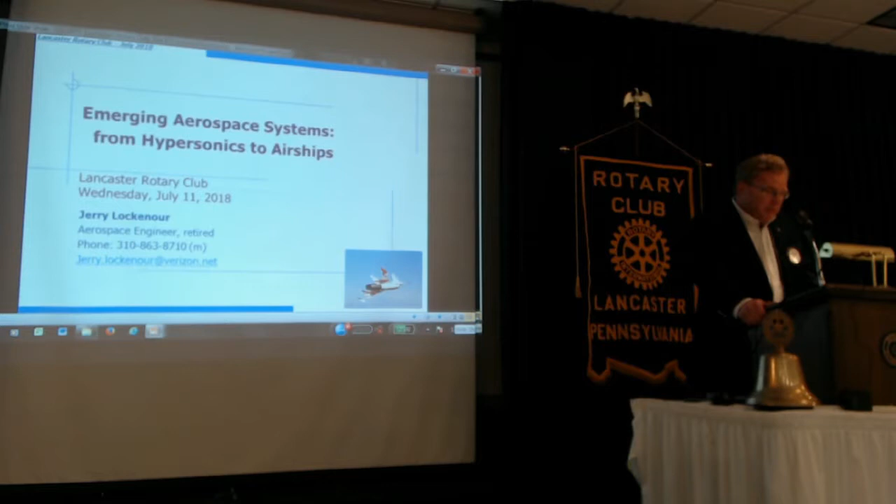Thank you. I'm coming to you from 40 years in Southern California. I moved here to the Lancaster area, and I didn't learn how to say it right off the bat 2 years ago. So I'm new to your area, but I appreciate the opportunity to talk to you. I did have a good excuse for not knowing how to pronounce Lancaster, though, because when I first moved to California, I lived in Lancaster, California. And that's where the NASA Flight Research Center is. So that was my first exposure to Lancaster.

Okay, so a little bit about aerospace systems. These are the things I'm going to talk to you about, a little history mixed in with where's all this going. So the main focus is on the emerging technology and where that's going to take us in the foreseeable future.

What we tend to do with any new technology is overpredict what it will do in the near term, and underpredict how it will change the long-term future. So some of these things you may not see tomorrow, you may not see in 5 years, but in 10 years, 20 years, you can bet these things are going to change the world.

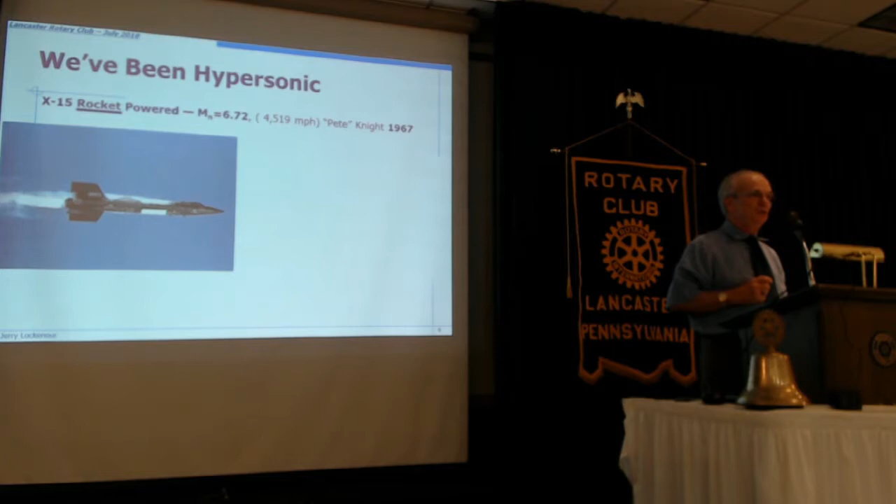Then in 1967, we went Mach 6.72 in the X-15, almost Mach 7. Again, rocket propelled. Rockets are good for going up into space, one-shot deals. We have SpaceX now starting to come up with reusable rockets, bringing back the first stage and reusing it. But it's not something you can turn around just by pumping in gas and going again. It takes quite a bit of refurbishment to get those rockets ready to go a second time, so it's really not a practical way to fly commercially or in general aviation.

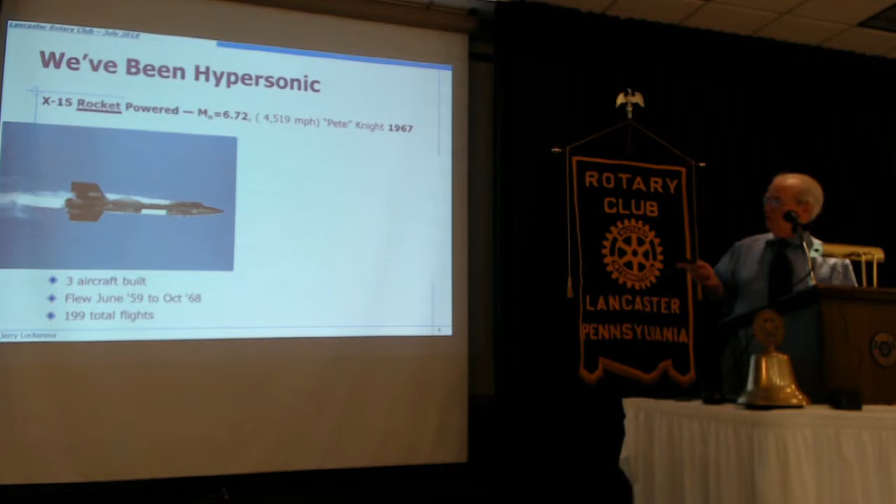They built 3 of these airplanes, just test articles, flew them for about 10 years, a very productive program with about 200 flights. Then in 2004, we're still upping the Mach number, up to almost Mach 10, 9.65 Mach number, almost 10 times the speed of sound, a little over 7,000 miles an hour. If we had a vehicle, a biz jet or commercial airplane that could fly at those speeds today, you could get from LA to Sydney, Australia in 1 hour. Real advantage to doing that.

And that last vehicle was not rocket propelled, it used scramjet propulsion, much more reusable, you can fuel it up and go again. So the main challenge in getting these high-speed flight conditions was getting the propulsion down. We had the Concorde, which could go supersonic commercially a few years ago, but it quit flying in 2003, not practical. They're still working on trying to get both biz jets and commercial jets to go at greater than Mach 1. The Concorde was Mach 2.

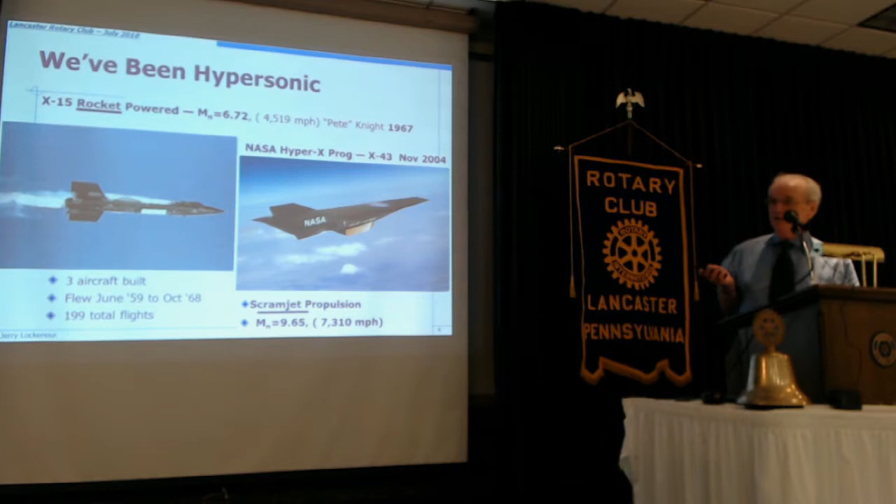One of the challenges of going supersonic is you're not allowed to go supersonic over land. That's one of the things that held the Concorde back - it could only fly over the ocean at supersonic speeds. We have restrictions in almost all major countries where, because of the sonic boom, you're not allowed to fly supersonic over land. So one of the things that has been going on recently is trying to figure out how to shape the airplane so that you reduce the sonic boom.

How many people here have ever heard of sonic boom? Okay, so you know what that's like - it's a thump thump, and if you're in your house, it rattles the dishes and that sort of thing. When I lived in Lancaster, California, right next to Edwards Air Force Base, you used to get that quite often, either at work or even sometimes in the local community.

So here's an airplane, the X-59. We've gone from X-1 to X-15 to X-59 and all the X's in between. These are all experimental, sort of one-of-a-kind airplanes where they're trying to prove certain things in flight.

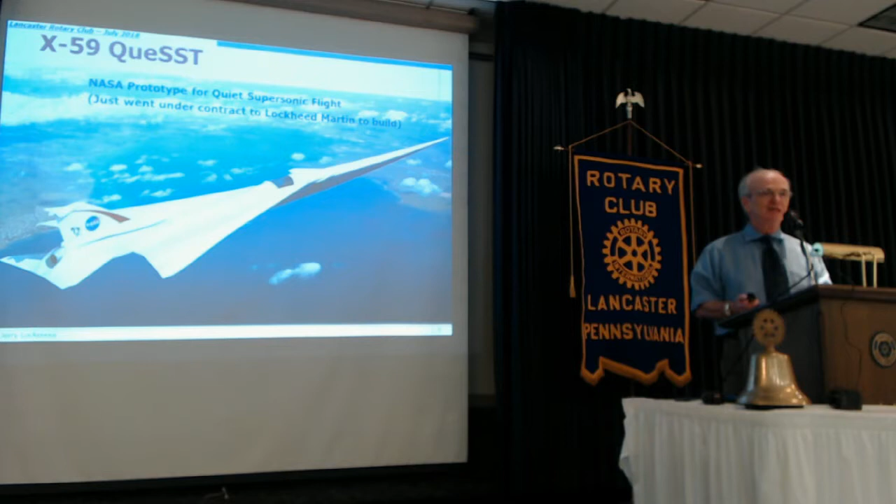All right, now we're going to go to the other extreme, airships. Not very fast. We had a lot of those back in the 20s and 30s, called blimps or other terms used for those vehicles. We still have a few flying around, the Goodyear blimp that will show up at football games and things of that sort. They really had their downfall in the 1930s.

There was a series of crashes where airships crashed, both in Europe and in the US. The most noteworthy one was the Hindenburg in 1937, a big fiery explosion. They were using hydrogen in some of the vehicles at that time, an explosive burning gas. Helium is the most forgiving gas - that's what they're using today.

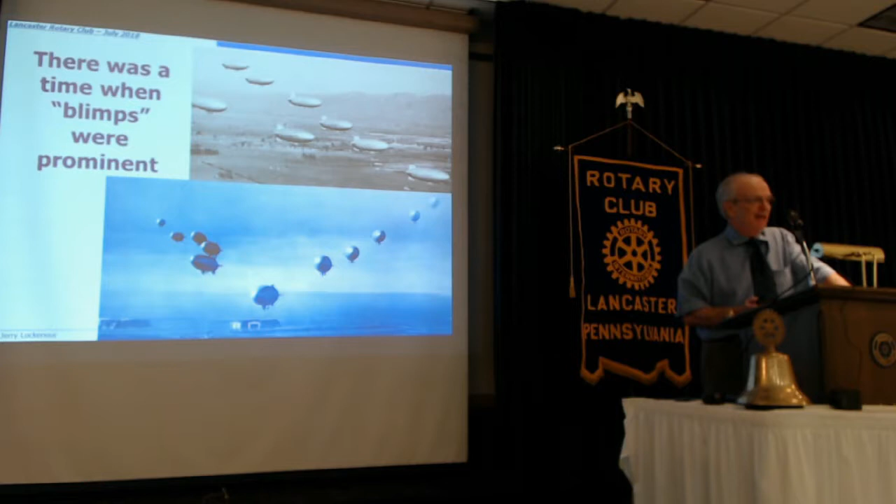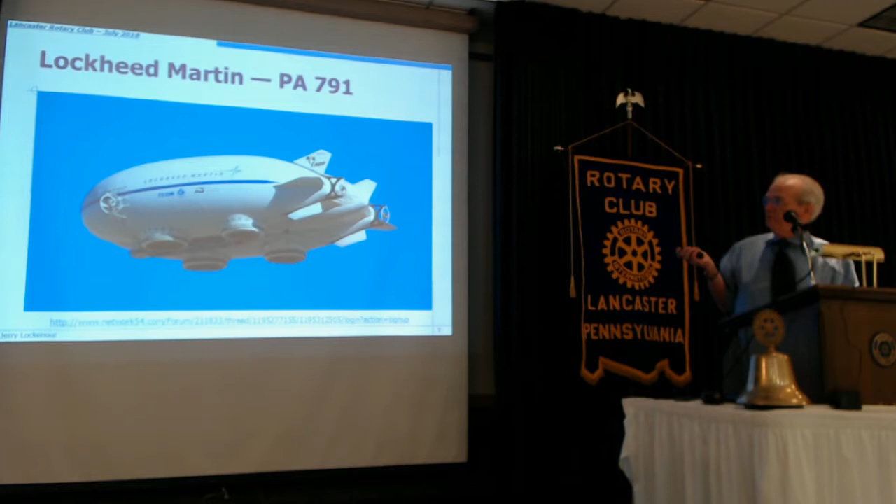Lockheed is experimenting with that as we speak, relatively recent. And there's this thing being built by Igor Pasternak, a guy from Ukraine who came over to the US, and out in California is building this airship, which is a variable buoyancy airship. It has compressors on board, so you can take the helium and either release it into the airship and become buoyant, or compress it down, reduce the amount of helium in the volume, and descend. So it's a variable buoyancy system.

The market, they think, for these is to carry payloads into remote areas. So if you're going to build a wind farm for wind-generated energy in the tundra of Alaska or Canada, there are no roads, there's no way to get there. So you either pay the expense of building a transportation system to the site, or maybe you'd use something like this to carry the payload in and lower it right there on the spot.

With the variable buoyancy, one of the problems you have with airships is as you offload payload, they want to go up, right? So with this thing, as you offload payload, you compress the helium and you keep your buoyancy fixed, and you can stay there on the ground and offload all of your payload. So pretty clever idea - it's still in development, in flight test in Montebello, California.

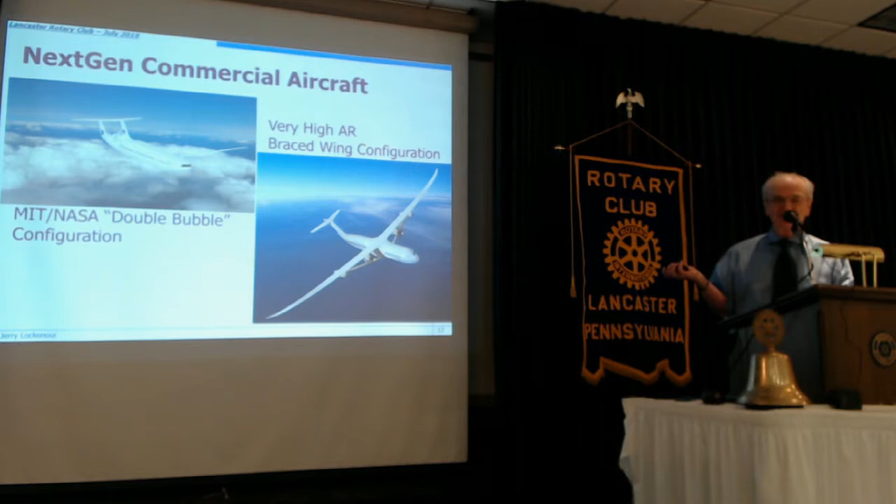And then putting them on the back where they can flow some of the air over the fuselage, sort of increasing the lift and reducing the drag of the airplane. You want to go to higher aspect ratio wings, which is like a glider - you want a lot of wingspan for the given area, and you can get more efficient flight that way. So they may go to braced wings like we used to have back in the old days with airplanes, doing that again to get a more efficient flight.

And then Lockheed is looking at what they call a box wing - actually tying the main wing with vertical tails, if you will, joining the main wing with the horizontal tail and making it a box configuration.

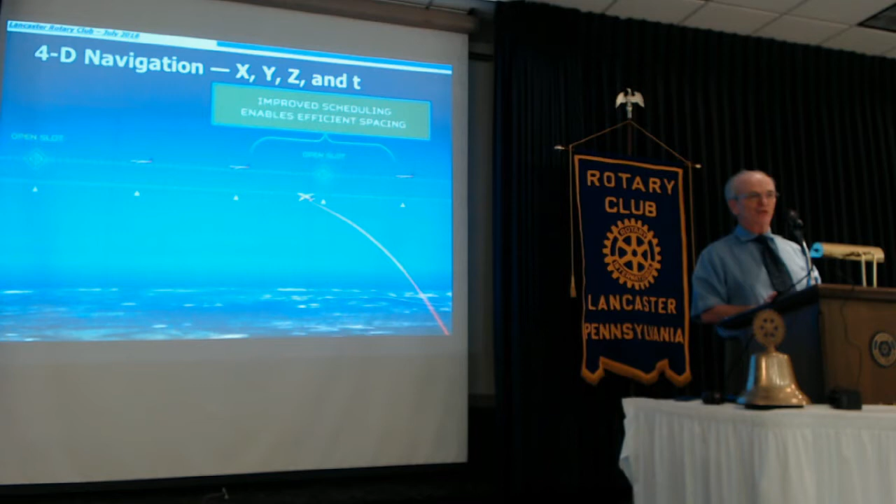Now, air traffic management. For some time now, we've had 3D air traffic management, where they control where you are in space - X, Y, and Z, altitude and position. Now they're adding the time dimension as well, so 4D navigation, controlling the spacing of all the vehicles. In the paths they fly in the sky, they would all be spaced so that when they get to their terminal airport, they're at the right spacing to land one after another, and take off the same way, making things much more efficient as air traffic gets denser.

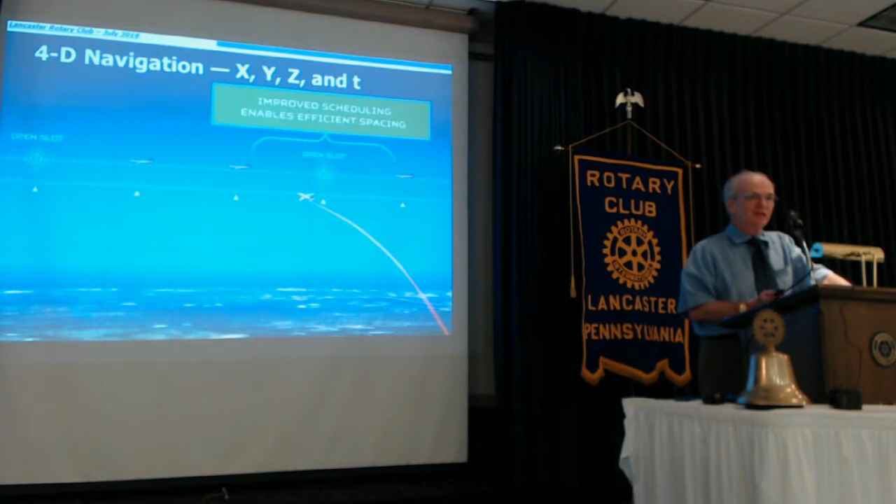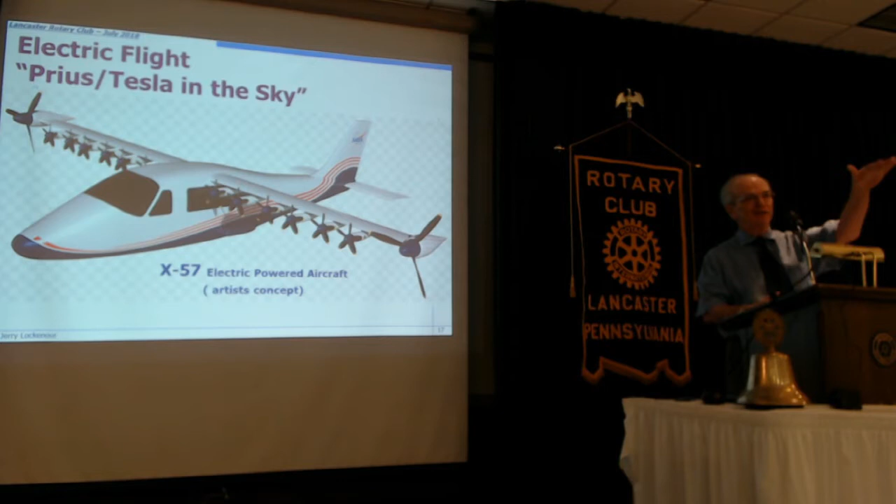They've already been testing this concept on a semi-truck, believe it or not, out on the dry lake bed at Edwards - putting a wing like this up on a semi-truck and going 100 miles an hour across the dry lake bed.

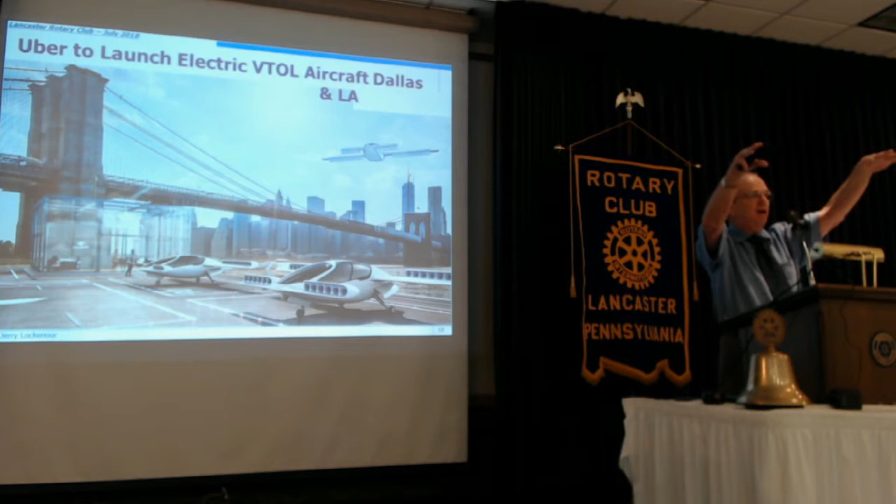Also, Uber is testing autonomous cars in Pittsburgh - they still have a driver in them, but they're autonomous and being tested. They're also looking at electric-powered small vehicles for use in the city, so when you fly into a major city airport and need to go downtown, instead of getting in a taxi or an Uber car, you'd get in one of these Uber flying machines, take off vertically, fly into the inner city, and set down vertically again. It's electric powered with distributed propulsion and a tiltable wing - you tilt it to take off vertically, tilt it forward to fly at high speed, then tilt it again to land vertically. Uber is planning to test this in Los Angeles and Dallas first, and they're currently looking for a third international city to run these tests.

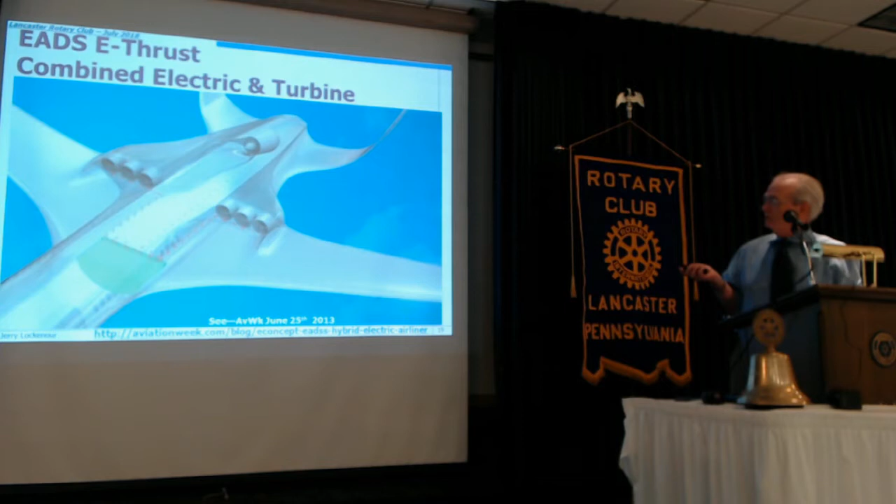Also, Cessna and the general aviation community are working on similar concepts for their more conventional airplanes.

And self-launching gliders - how many people here have flown a glider or flown in one? Okay, just a few. Normally you get towed up - you hook your glider to a tow airplane with power, it tows you up, releases the rope, and you glide from there. If you're lucky or know what you're doing, you can soar and climb from that release point. I have a friend in California, about 83 years old now, who held the world record in a glider - he soared up to 52,000 feet.

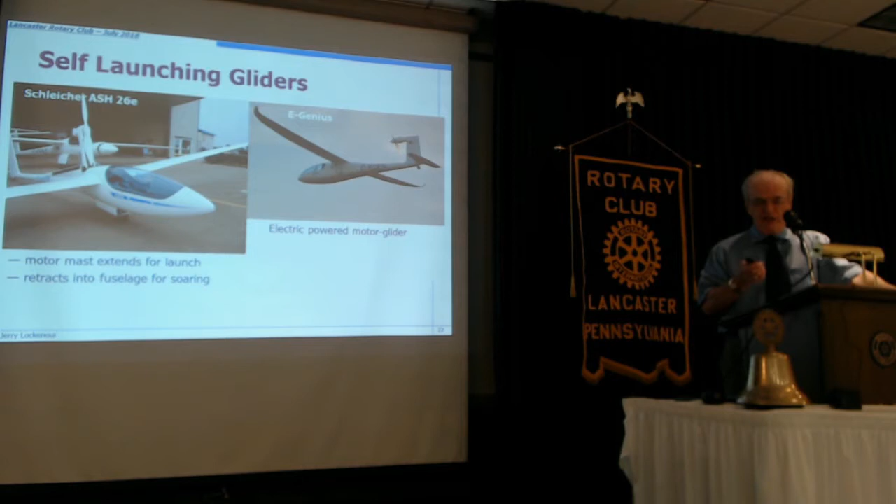This is another vehicle, the Solar Impulse 2. Has anyone heard of it? A few. It's done a round the world flight. Before that, it came to the U.S. and flew coast to coast, stopping several times since it doesn't go extremely long periods without stopping to rest for a day or two before flying again. For the round the world flight, it took them over a year, 16 and a half months, in 17 stages, so they stopped 17 times. They did have to cross the Pacific Ocean, as you can imagine.

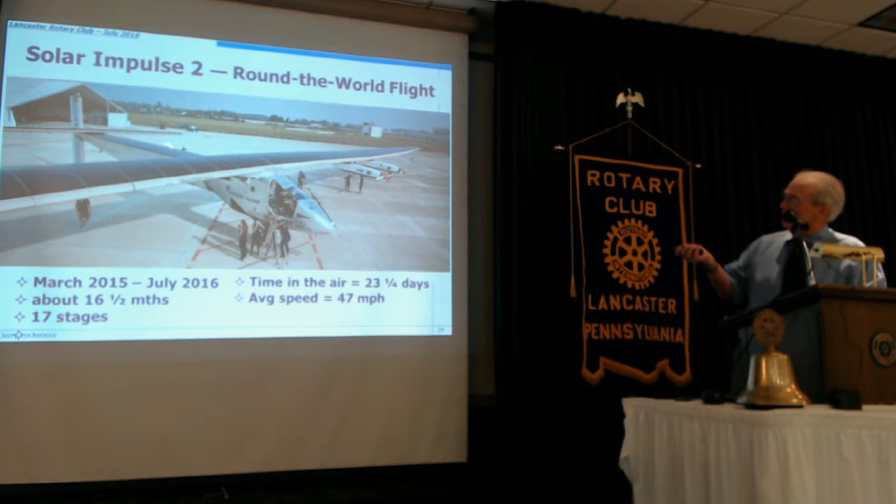It flies at 47 miles per hour, very slow for a flying machine. You can see solar panels across the whole top of the wing, the fuselage, and the horizontal tail, lots of solar collectors. They would fly overnight at full power, climb up to their max altitude during the day when the sun was shining, power back to save energy during the night, and descend. Then, hopefully still above the water when the sun comes up the next morning, climb back up and continue their mission. They were successful doing that, staying in the air 23 plus days. They were down for quite a while in Hawaii redoing the batteries, having learned some things in the first half of their journey flying from Abu Dhabi to Hawaii, which took them several months at that point.

Now, vertical takeoff. I haven't said anything yet about helicopters or rotary wing vehicles. We've been building helicopters for a long time, and they're very good, very efficient at taking off and landing vertically, but they can't go very fast in forward flight. The reason is the big rotor going around, you get the forward flight speed added to the tip speed of the advancing rotor blade, and when that gets to near sonic, almost supersonic conditions, the drag goes up horrendously. So you're limited in how fast you can go forward in a conventional helicopter.

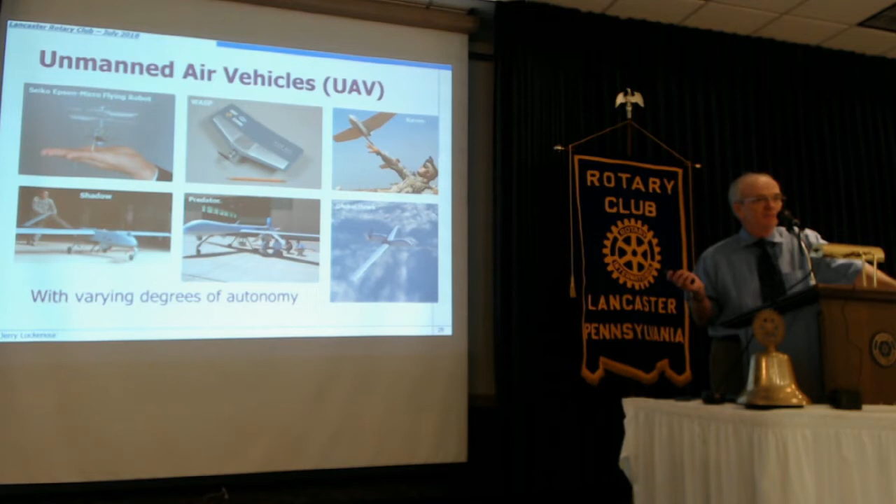The military is using them in all sizes, from teeny tiny all the way up through about a 1 foot span to much larger devices like the Predator and the Global Hawk. The Global Hawk is almost a 737 size flying machine, jet powered and quite large. There's a picture of it in flight and on the ground, so you can get a feel for the size of the airplane.

There's a great big SATCOM antenna in the forward portion that can get satellite communication, so you can fly this thing, control it, and direct it from the other side of the world. In fact, when these things are flying in Afghanistan, most of the controllers are at Beale Air Force Base in California, controlling and telling the vehicle what to do in Afghanistan.

We've also got unmanned autonomous vehicles being landed and taking off from aircraft carriers. Still experimental, not in production yet, but we've proven it can be done. The Navy is releasing procurements for those kinds of flying machines for aircraft carriers, and I think to start with as a refueling aircraft, not as an operational military aircraft.

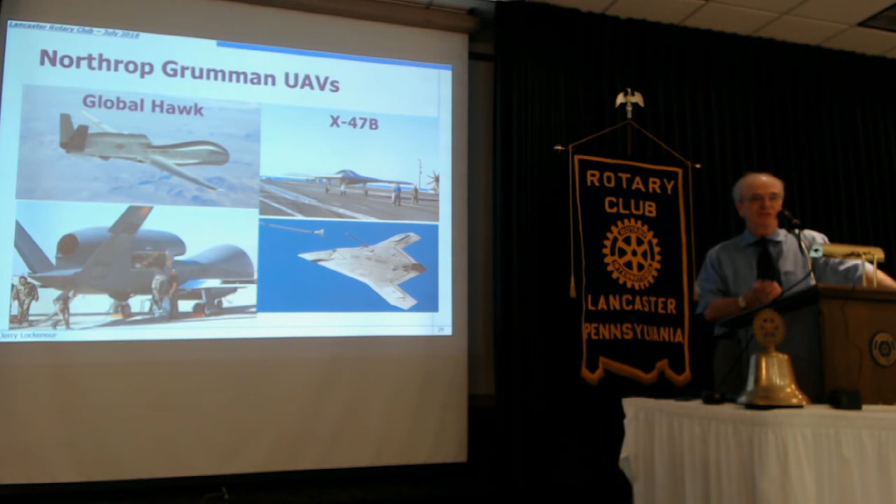Internet to the third world. We are at a stage today where almost half of the world's population, about 4 billion people, do not have internet coverage. They can't use internet on their smartphones and that sort of thing. So Google and others are trying to get internet coverage to the rest of the world.

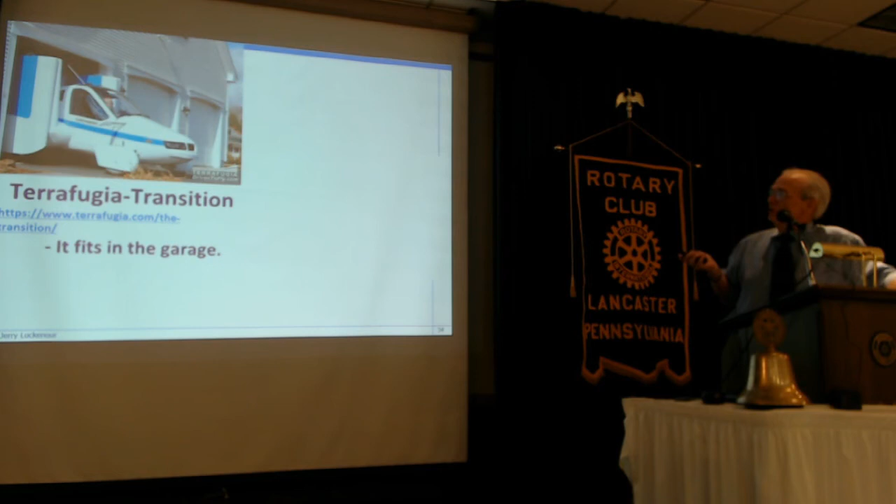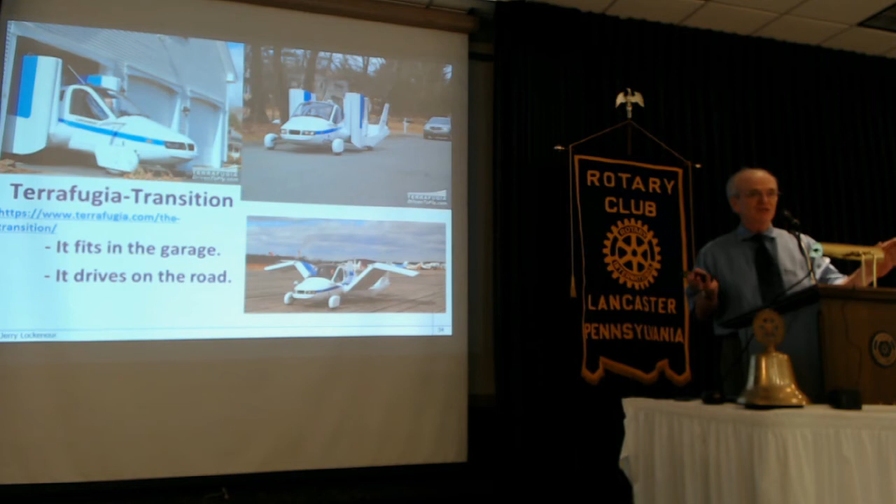So now we've got this company outside of Boston, Terrafugia, that has built and flight tested this vehicle. You see it being parked in the garage here. You can drive it on the road, go to your airport, and unfold the wings just with the push of a button. It's very automated, very slick, and it's got a pusher prop. You simply pull a lever in the cockpit or driver's compartment, and it shifts the engine from the wheels to the propeller, and away you go.

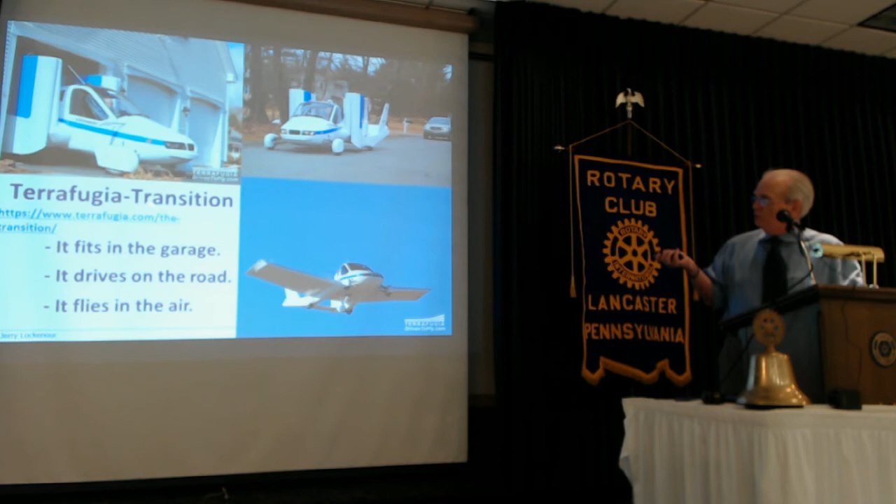I've added links in some of these charts so that if you want to go to the internet and look at these things in more detail, you can do that. And that's not the only one.

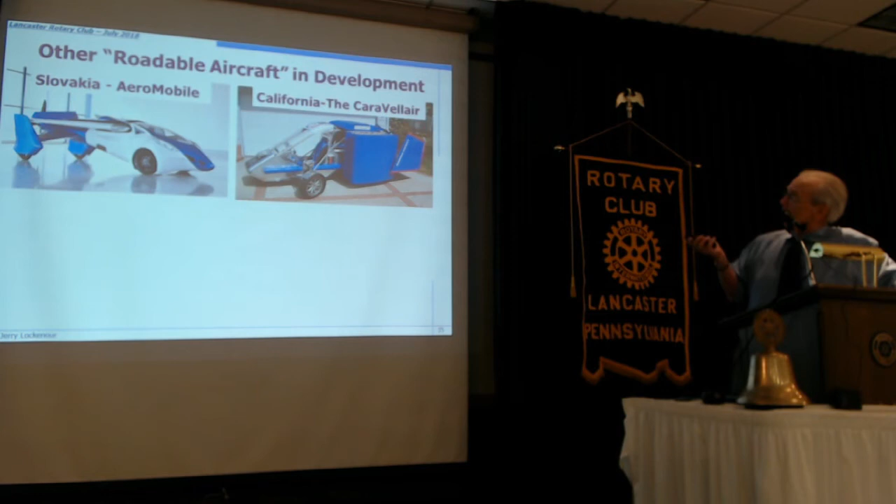There's a bunch of these being worked on around the world. In Slovakia, in California, a little three-wheeled motorcycle, classified by the DOT as a motorcycle class vehicle. Again, put the wings on and fly from your local airport. These aren't made to take off from your driveway or the highway, you have to go to a legitimate little airstrip to take off.

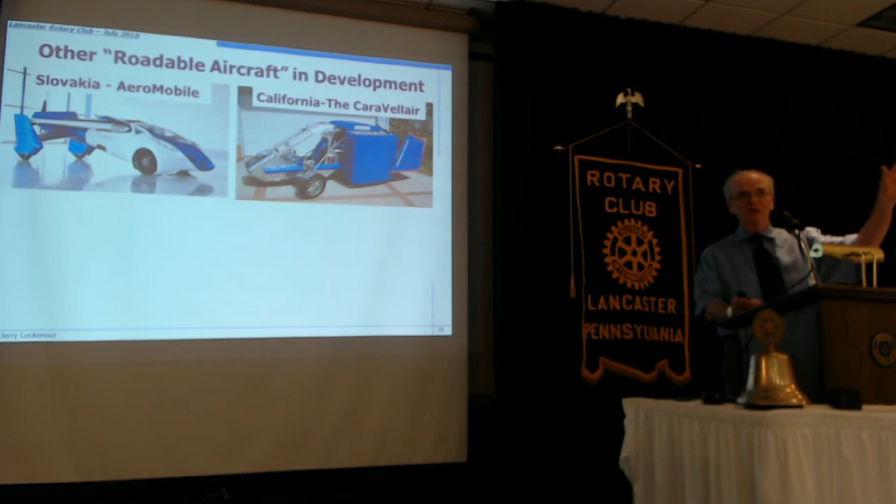In Germany, same thing. And then, would you believe, in 1949 there was in fact a flying car. There were 5 of them built, I believe. One of them I just saw a couple years or so ago, sold, still flyable, sold for close to $1 million.

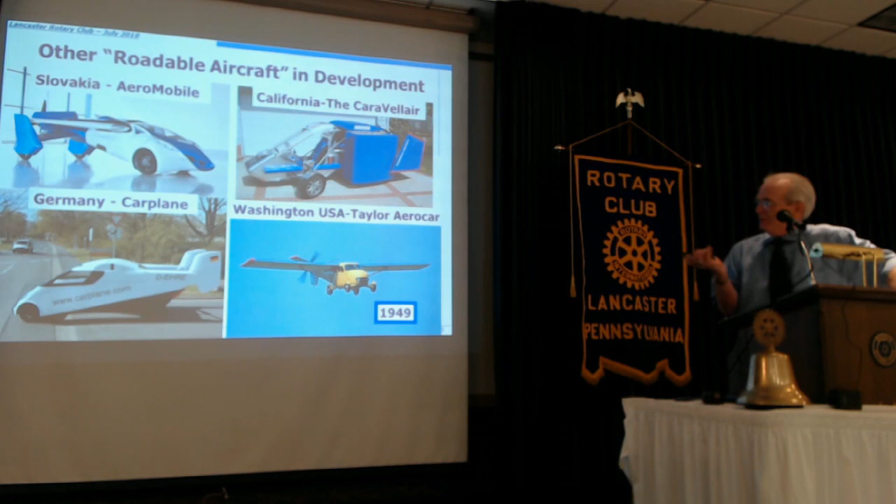But it was not nearly as user-friendly as the other one I just showed you, the modern one. This thing probably took you an hour to get it bolted together and ready to fly. You towed the wings and the tails and so forth behind the vehicle on separate wheels and that sort of thing.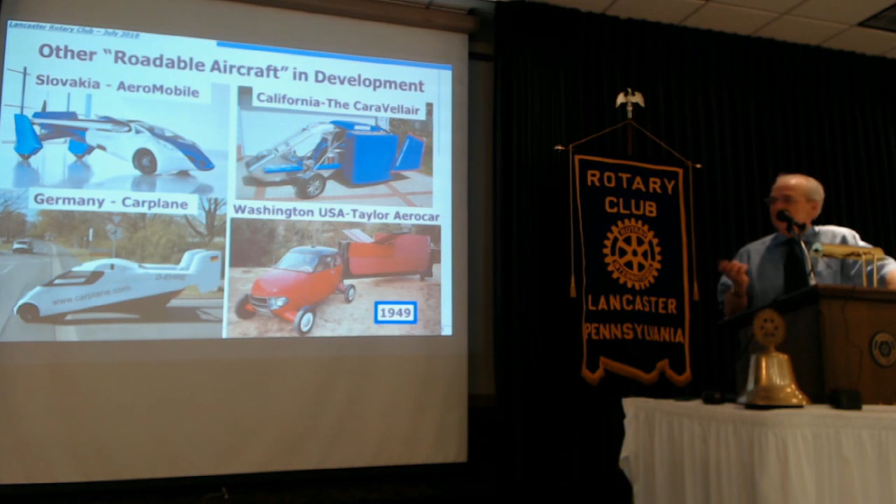Fran Hines and I went just a couple weeks ago up to Lock Haven, Pennsylvania. This was the site of the original Piper Cub factory. It went out of business in the 50s or 60s due to a flood, and their main plant for Piper now is down in Vero Beach, Florida. But they still have a museum, a Piper museum there.

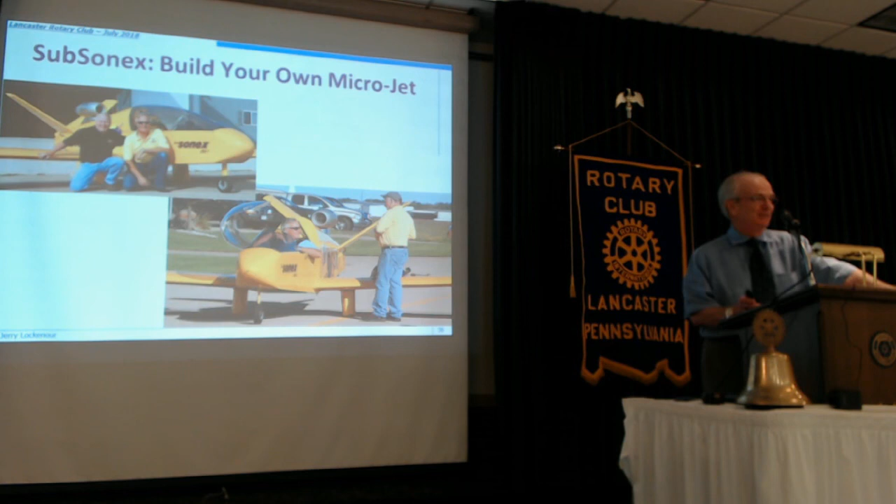And they had a Sentimental Journey fly-in, called Sentimental Journey to Cub Haven. So they didn't call it Lock Haven, they call it Cub Haven, right? So all these Piper Cub freaks, forgive me, I say that lovingly, they all flew in there. It's a big fly-in, like a 5-day Woodstock event for Cub airplane nuts.

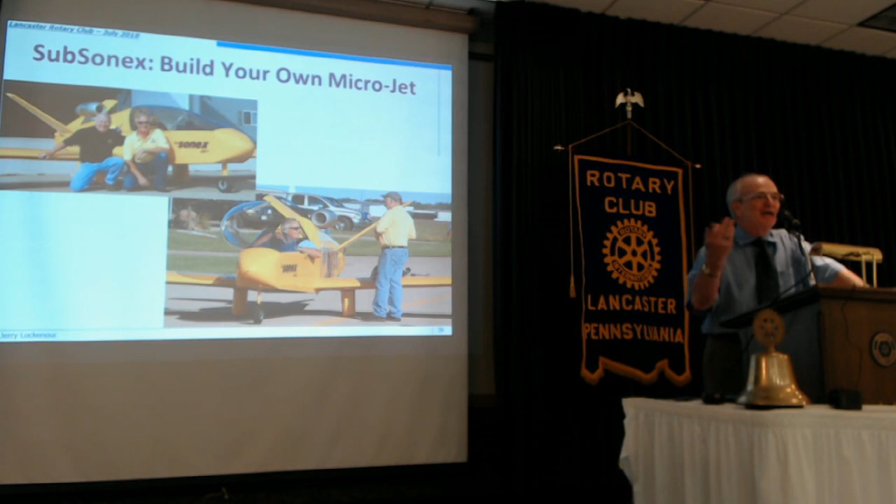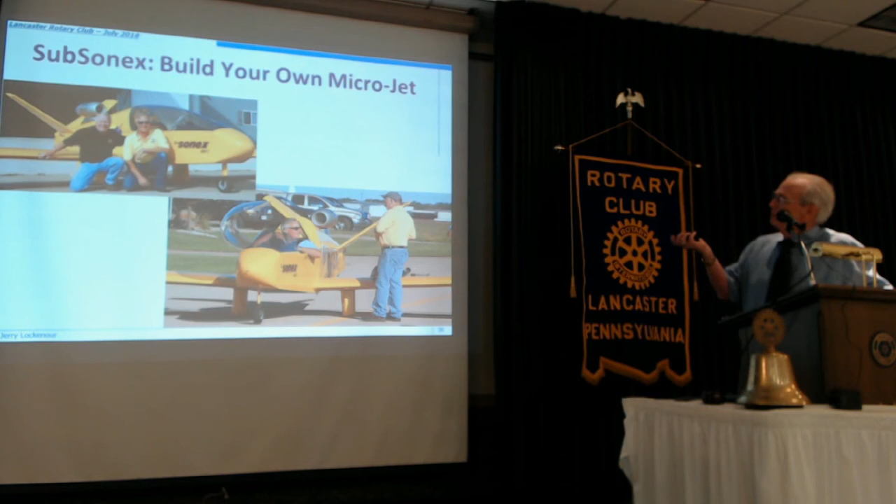They had outdoor activities, singers, food available, all kinds of things, and hundreds of airplanes there of all different sorts, mostly Piper Cubs. But this is not a roadable aircraft, you can't drive this out on the road, but it would be big fun, I think.

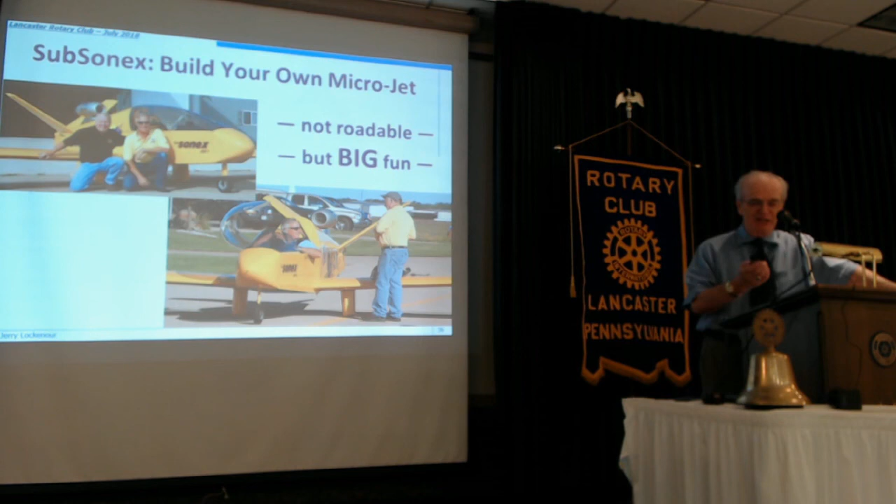And we met a guy at this Piper Museum, at this event in Lock Haven, that had built one of these and flew it, and he gave a talk at this fly-in in Lock Haven.

And of course, with a helmet, I'm thinking I've never stuck my head out of a car window going 100 or 120 miles an hour, but that would be interesting.